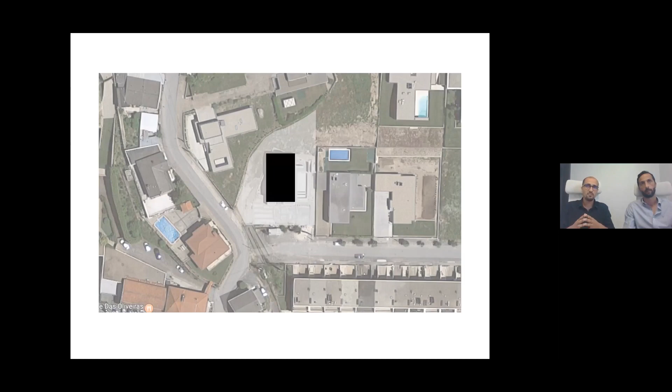From the very first moment, we realized we had to disrupt the neighborhood building's pre-established rule. Our plot, being the end one, had an even bigger altimetric difference, demanding both sides to be buried on the access level, confining to a two-way sunlight orientation on the lower floor. With all these constraints, we present a rules-changing proposal to the council in order to explore more sunlight from every direction.

Therefore, as a strategic concept, we define that we will use voids, endogenous and exogenous, to reach the light in every single direction, concerning the circumstances, and at the same time, let them define the kind of relations users can have with the exterior. The exogenous voids will relate us to the external and social activities, and the endogenous ones to the private areas.

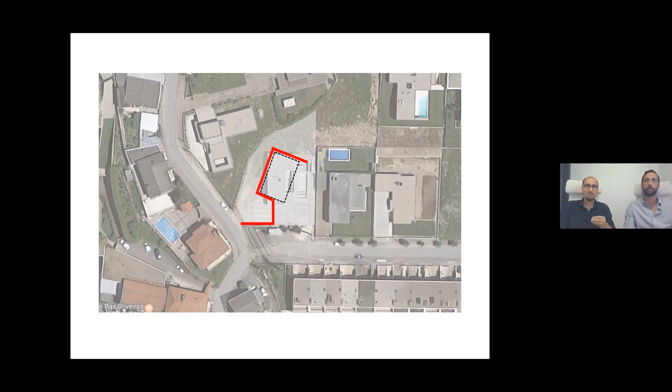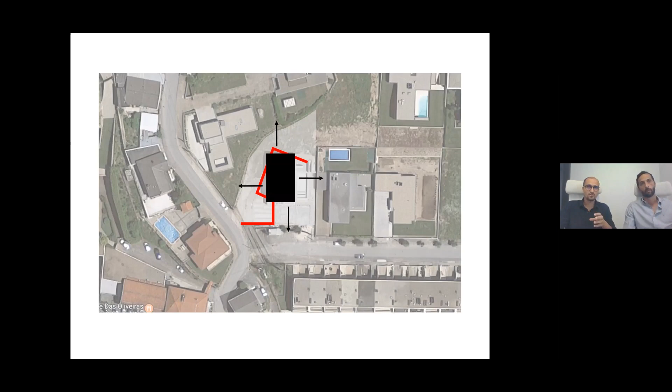Basically, the idea was to rotate the imaginary lower volume, keeping the upper volume on its natural and pre-established position. With this option, we guarantee that every single space on both levels was able to get light from every single direction, regardless of the time of the day. This rotation of the landing volume defined an embankment wall, allowing the creation of the exogenous voids and a more natural light explosion. As we can see, the voids.

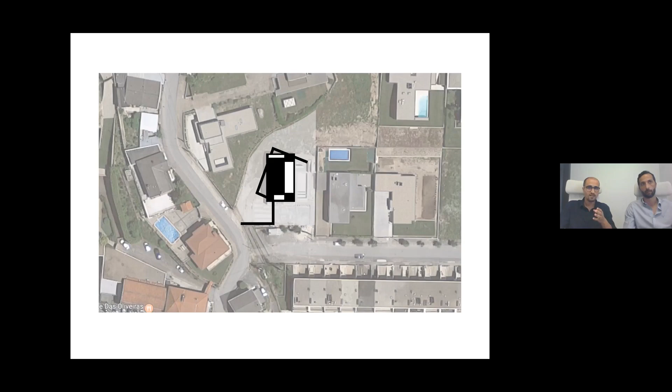For the element above, we defined an enclosed monolithic volume for the exterior, but enhancing its internal connectivity as the referent in endogenous voids. The voids. The model shows us straight away this idea: a monolithic nest that lands in the embankment walls. That volume suggested to us a natural material cladding, organic, heterogeneous, in opposition to the brutal built expression of the embankment wall.

The level below should happen in this imaginary boundary between the projection line of the volume above and the embankment wall. Something transparent, permeable, and continuous, allowing the interaction in all social spaces of the house, both interior and exterior ones. The exogenous voids allow these immediate and amplified exterior-interior relations, as well as the natural light in all spaces on their main occupancy cycles.

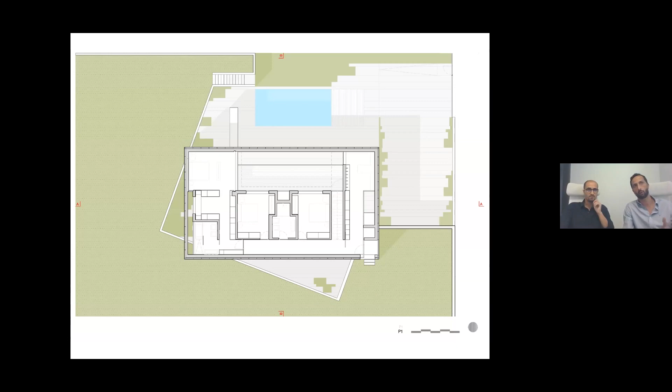On the level above, more exposed to the surroundings, arise the endogenous voids, more protected and controlled. It was important for us to enhance the interior dynamics resulting from its occupancy and the vertical interaction without allowing the volume enclosure to cause a sense of isolation. From each space of the private area, we can establish a visual connection with the social areas.

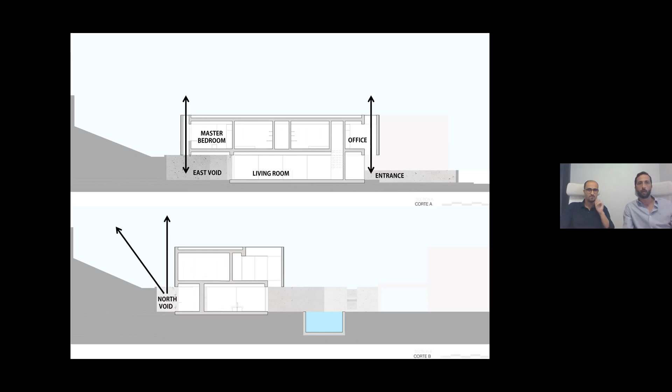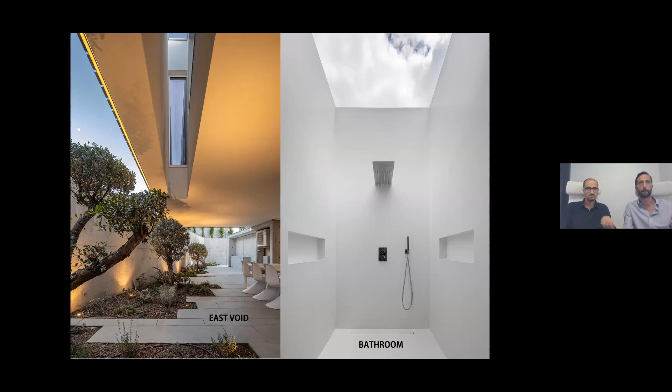With the exception of the big void common to bedrooms and office space, with a level between social and private zones, the other private spaces are punctuated with a specific natural light. So we think an architectural exercise searches for a harmony between the constructive system and the architectural language. Throughout the design process, we found a number of dualities, and it is mirrored in other areas.

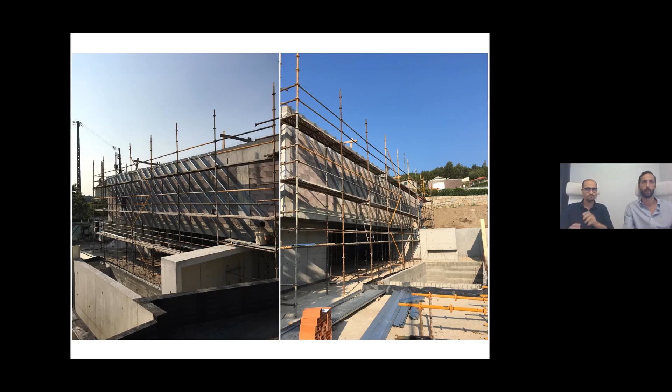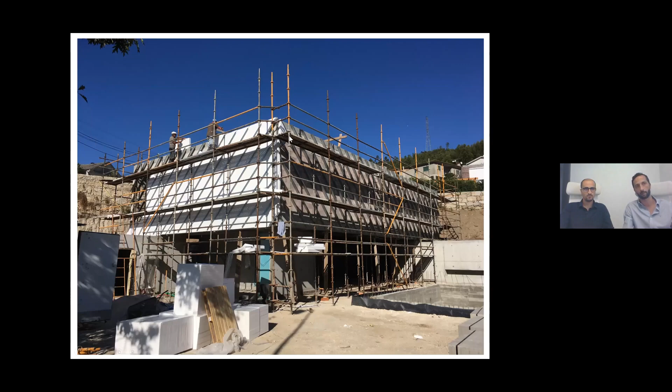On the constructive system, having the in situ cast concrete, we moved to a portico structure with insulated blockwork. We preferred the external insulation to cover the metal structure profiles implemented at 45 degrees in the opposite sense to the external timber cladding. Also worth referring to, the back panels of the facade are painted in black to reinstate the shadow and conceal the constructive elements.

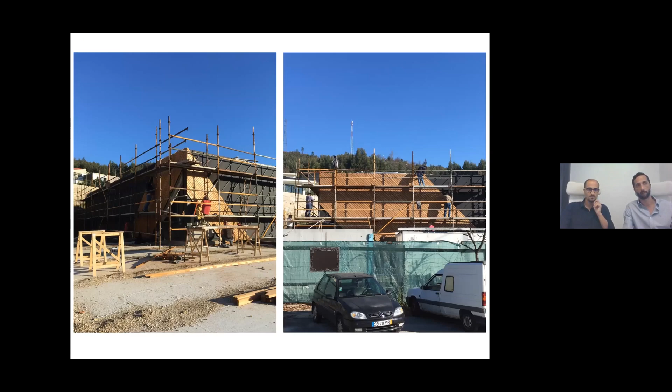The section of the exterior timber cladding had to abide by some requisites besides its weathering behavior. One of them was its length. We wanted to make them total length and not a typical wooden floor pattern. We wanted to allude to a certain feeling of a nest resting on the embankment walls, and for that we also intended to include the fixings as an aesthetic element of the facade.

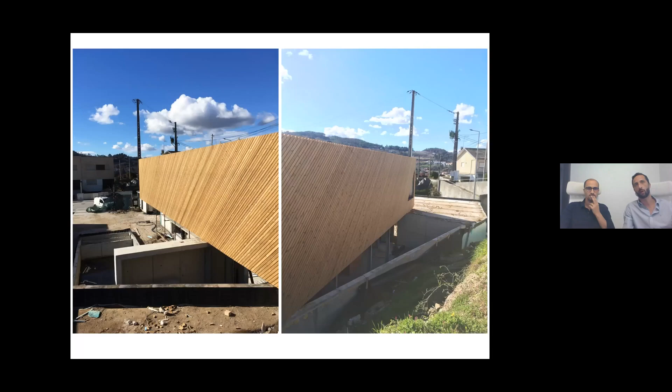In the following sequence of pictures, all of them taken on the same day, we can see the camouflage effect that we get from the material when it gets different sunlight. It kind of matches with the concrete walls. At this stage, we double-checked our expectations in relation to the timber effect. Its richness in tones, in the natural expression of the material, with some darker shades than others, like branches and also its knots.